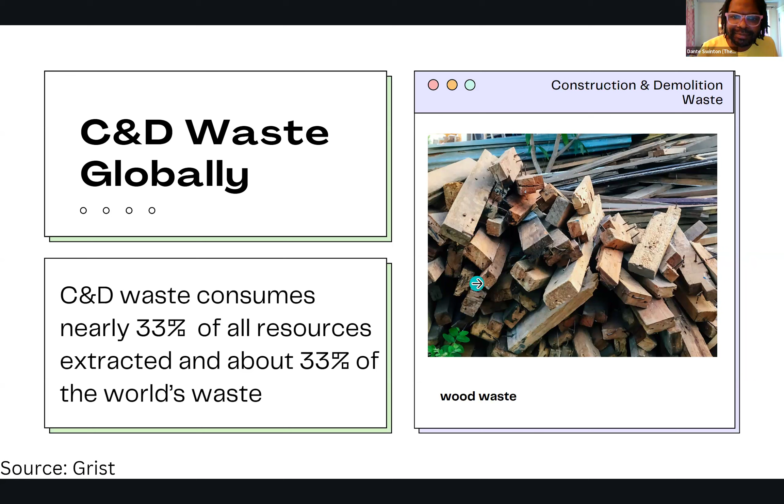Building materials alone are a massive part of the world's extracted materials, guaranteeing to be a major contributor to climate change. Manufacturing the materials that make up our buildings produces over 10% of the world's carbon emissions. To give some greater context, the aviation industry contributes about 3% of global carbon emissions. So building materials account for 4 times as much of that embodied carbon.

Closer to home, some 150 million tons of C&D waste find its way to landfill every year, even though much of those materials could be recovered.

The demolition materials are commingled, like this picture shows, and like household waste, that reduces the potential value that exists in recovery. And so we have to ask ourselves, what exactly are we doing as a society right now?

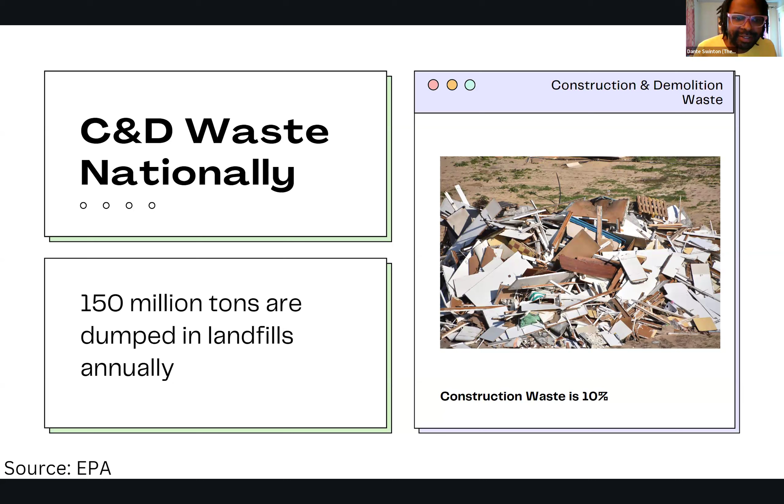Leigh and Patterson, back in 2006, probably said it best: demolition turns assets into liabilities. Instead of utilizing that building again, or maximizing the value of the individual components, jurisdictions are often responsible for the long-term management of these materials. We need to develop a system that meets the mandate of a sustainable future, and that's why we are here today.

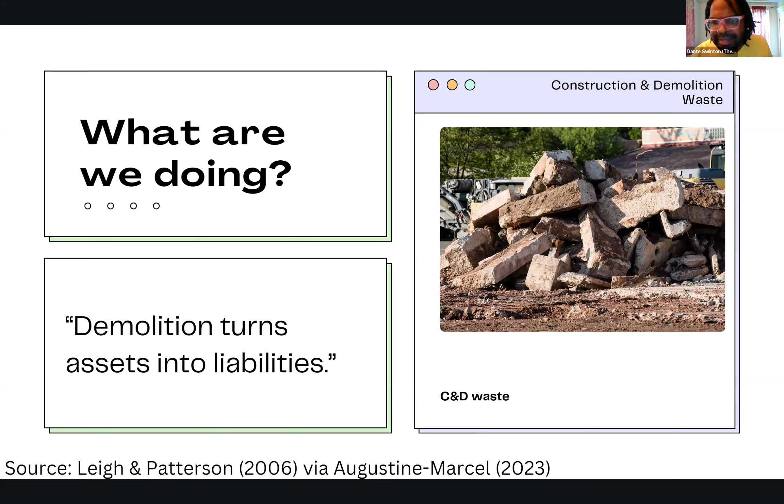So what is deconstruction? The careful dismantling of structures piece by piece in order to harvest the materials to be salvaged for reuse.

Deconstruction is a money maker. It's worth $1.4 billion in revenue just in the year of 2022. In fact, when compared to the US economy as a whole, material reuse industries are expected to grow at a faster pace. In the next 10 years, growth in reclaimed lumber, aggregate, and plastics are projected to outpace the US economy overall.

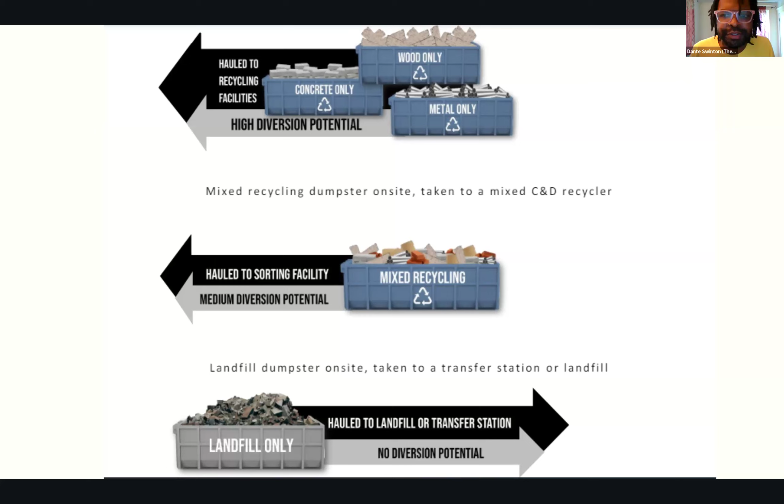Here is a great infographic from the City of Nashville's Construction and Demolition Guide for commercial projects. If we start from the bottom, we have the usual commingled materials with little to no value. There is a middle ground where some of the recyclable materials are sent off-site, as you can see in the middle of the screen here. And while you get some diversion, you will not get as much as the top image here, which shows source separation on-site prior to transport.

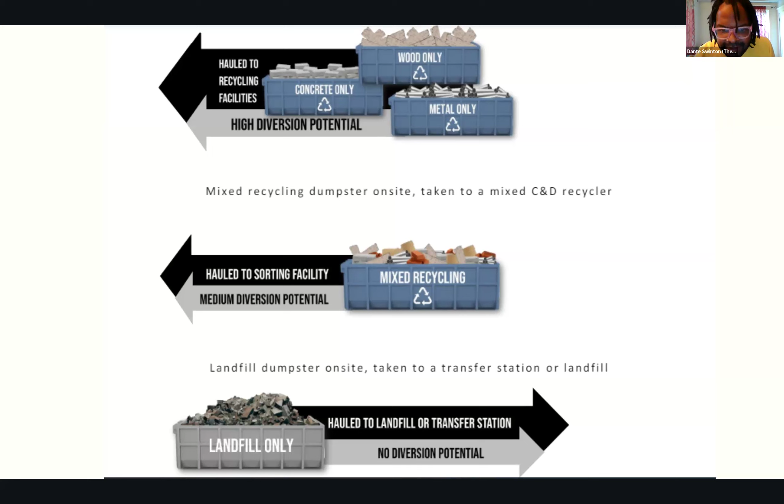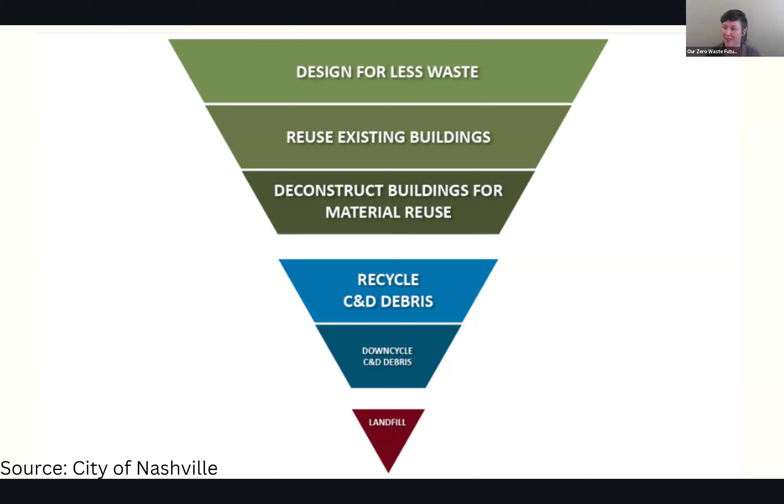And we'll see examples of where that has already taken place in our city. Blue highlights recycling, whereas the least desired outcome is highlighted in red at the landfill. The future is prioritizing reuse.

Here we see an example of a truly missed opportunity with the old Baltimore City Community College Bard building in the Inner Harbor. It was built in 1976. This building had been vacant since 2009, and proposals to repurpose the site were rejected by the college while it sat vacant for 15 years.

A quote taken from The Architect's Newspaper says: 'One of Baltimore's former housing commissioners was an architecture aficionado who kept a wish list of prominent architects he'd like to see design buildings for the city's skyline. And he landed many of them. Others enlisted to design buildings in downtown Baltimore included Henry Cobb for the World Trade Center Baltimore, Edward Durell Stone for the Maryland Science Center, and Benjamin Thompson and Associates for the Harborplace Pavilions. We need to prioritize architects that are designing their buildings with the future of sustainability in mind.'

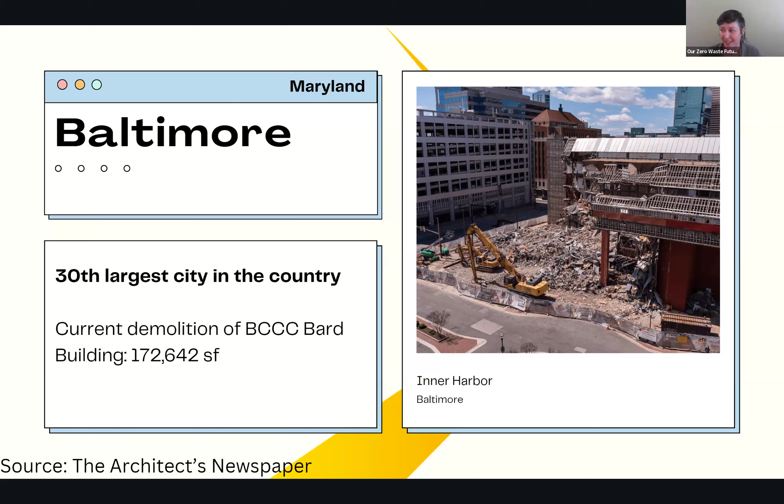I don't know how many of y'all drove past this demolition taking place. I think it's almost done. There's not that much left, but I can easily see materials that could have easily been salvaged for reuse in construction of a new building. But when you take a wrecking ball, nothing is safe for reuse.

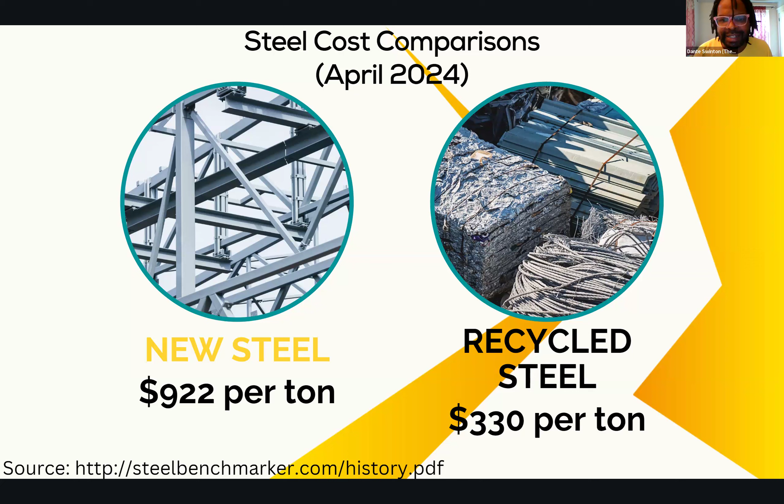So, using reclaimed materials can save developers money. Just one example is reused steel. As of April 2024, recycled steel costs about one-third the price of new steel in the US. Obviously, there's a lot of savings there.

Of course, not every reclaimed material will save you money. New wood is far more plentiful and therefore cheaper to acquire for new projects. However, it does not have the strength nor character of reclaimed wood, and the aesthetic is very different and less desirable.

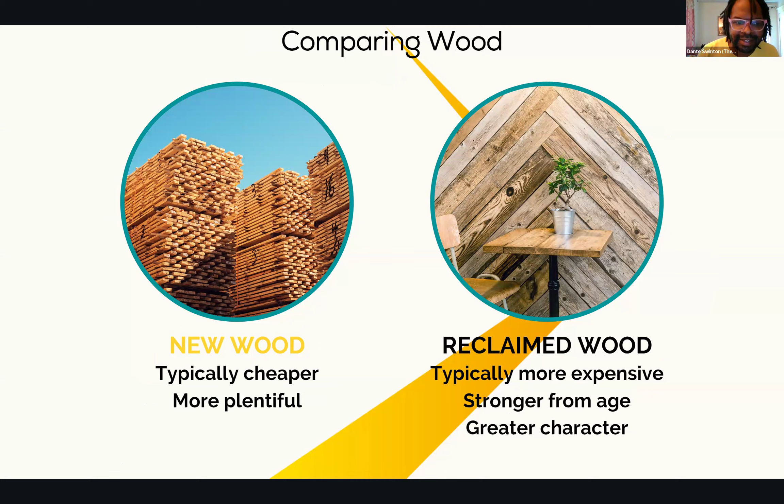Next slide. So here we'll take a couple of snapshots of cities with examples of deconstruction. In Pittsburgh, the current process of demolishing buildings mechanically is both expensive and environmentally harmful. Since 2015, the city of Pittsburgh has spent over $12 million demolishing structures and issued private demolition permits valued at over $24 million. The mayor at the time in 2021 realized that there needed to be a change.

Indeed. And so if we move over to San Antonio, a city much larger than Baltimore has implemented deconstruction policy. The city's deconstruction ordinance began in phases, starting in 2022 with all city-executed removals of residences built in 1920 and historical buildings built in 1945, and Phillips will expound on this later. It is important to share that San Antonio's commitment to waste diversion, as the nation's 7th largest city, is something we should look to consider for Baltimore.

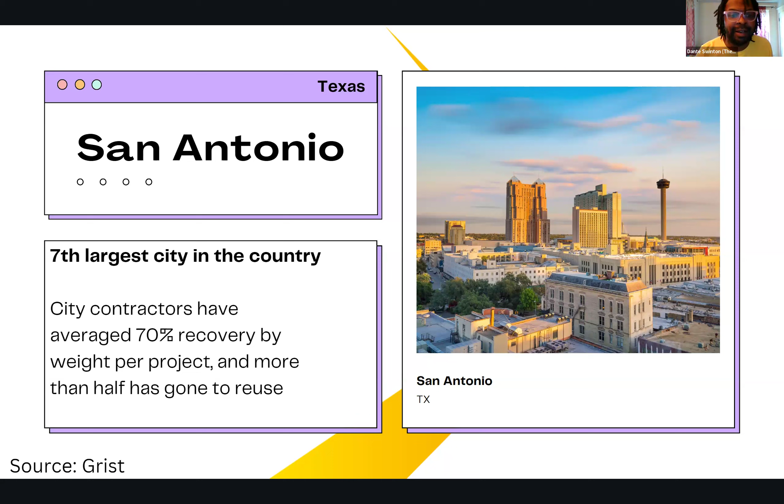Next slide. So here in Milwaukee, it's a similar size as Baltimore, being the 31st largest city in the country. In Milwaukee, we glean lessons learned from false starts and suspensions and issues with hiring contractors due to not meeting the local hiring aspect in their contracts. In Baltimore, we're working on the most forward-thinking policy, so understanding these pitfalls is crucial.

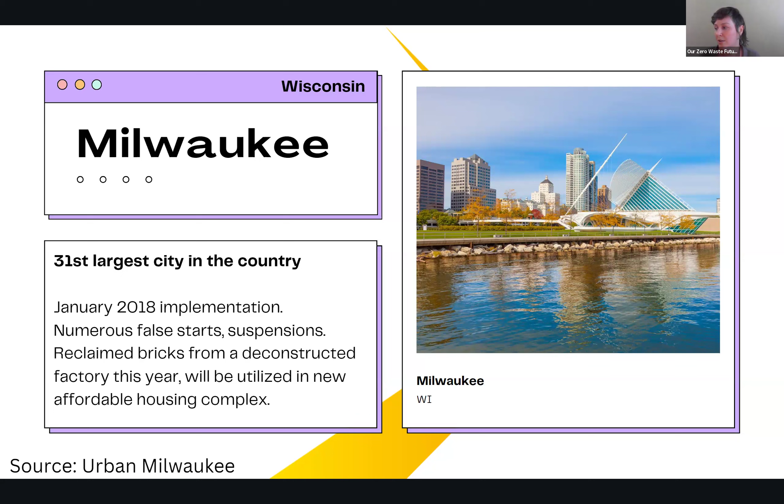So Portland was the guinea pig in the US, passing the first deconstruction ordinance back in 2016. Like San Antonio, it had a phased approach, first requiring all single-dwelling and historic structures from 1916 and earlier to be deconstructed. This was followed by an expansion to all pre-1940 single-family homes and designated historic structures.

Next slide. So in Detroit, we highlight more lessons learned from a city similar in size to Baltimore, also with a trash incinerator that has since been closed and was demolished last year. They also have similar issues of a large vacant housing stock and the need to remove blight. So despite there not being a policy, the Architectural Salvage Warehouse of Detroit is a nonprofit doing deconstruction in the city, attempting to reclaim the valuable old growth wood used in their older housing stock.

Executive Director Chris Rutherford states that out of the 2,500 projects slated for demolition in 2023, they're hoping to win demolition contracts so they can partially deconstruct 50 projects this year, 2024, and over the coming years, 50 each year, which would be a first for a deconstruction-focused company in Detroit.

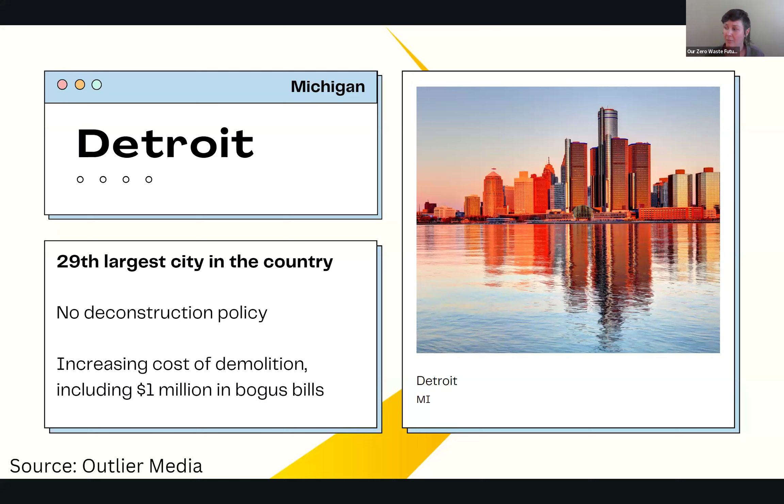He goes on to say that the climate for it is changing in our favor, he said of deconstruction. People are starting to realize that construction and demolition waste is a huge component of what's going into the landfill, and of what's also producing carbon emissions. City leaders, he added, were doing the cheapest things they can, which externalizes the cost, of course, by filling up the landfills, but you can understand the motivation.

Absolutely. Thank you, Steph. All right, so we can even look to smaller communities for leadership on deconstruction. Boulder, Colorado, about a fifth the size of Baltimore, was home to one of the largest commercial building deconstructions in the country, with the breakdown of the old Boulder Community Health Building.

Some 60-plus million pounds of material from the site were salvaged and reused, including steel in a new fire station. Some of the materials wouldn't even leave the site at all, contributing instead to the foundation of a future affordable housing project.

Now, as Steph mentioned earlier, think again about the 173,000 square foot bar building downtown here in Baltimore that was demolished instead of deconstructed, and how many millions of pounds of materials could have been reused. Next slide. You got it.

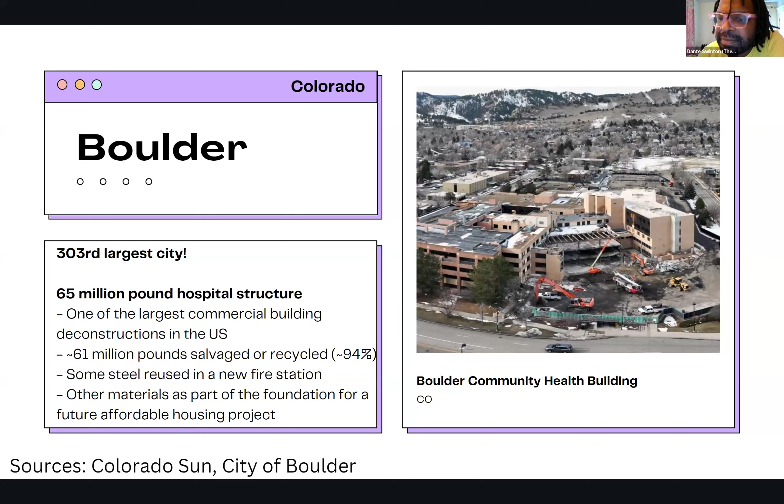All right, so after considering all of the lessons learned, it makes sense to do deconstruction over demolition to reduce pollution and create jobs. So Baltimore has the opportunity to be a leader in the country by passing the ReBUILD Act.

So let's take a look at the tenets of the bill next. Thank you, Steph. Here are some of the main tenets of what we envision in the ReBUILD Act.

Any building, commercial or residential, that would be safe to enter or able to be stabilized would require deconstruction. If hazardous materials are identified, abatement would also take place, like lead and asbestos.

The city would increase demolition permits and establish deconstruction permits, which would be cheaper to make the approach more attractive. The revenue from these permits would support the administration of the program and provide grants for new or existing businesses in the field.

The piece that would make Baltimore a landmark policy, however, is the requirement of new developments to use an increasing minimum percentage of reclaimed materials to spur demand. Credits would be available for a developer surpassing the minimum by 4 points via weight or cost of the project. Homeowners would also have access to a tax credit using reclaimed materials.

Next slide. In this Fast Company article titled, 'Buildings are terrible for the environment and this arena is proof,' according to the analysis, the former Royal Farms Arena was renovated for the CFG Bank Arena, eliminating the need for an estimated 3,500 tons of steel, 25,000 cubic yards of concrete, and 1.45 million gallons of water.

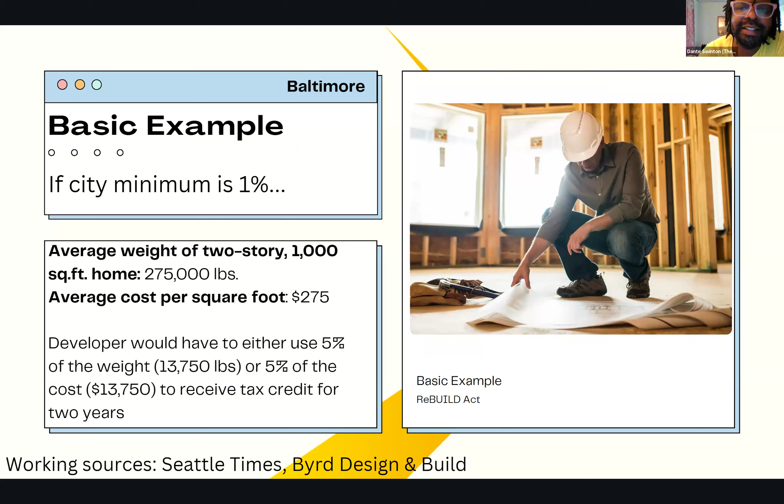Here's what a 4-year rollout of the policy could look like, which includes a 2-year period from passage to the deconstruction requirement. So for example, if the bill passed today, the deconstruction requirement would go into effect in 2026.

This would pair well with the recent building code update that requires 70% reuse or recycling of construction materials. Obviously, our preference is for reuse over recycling.

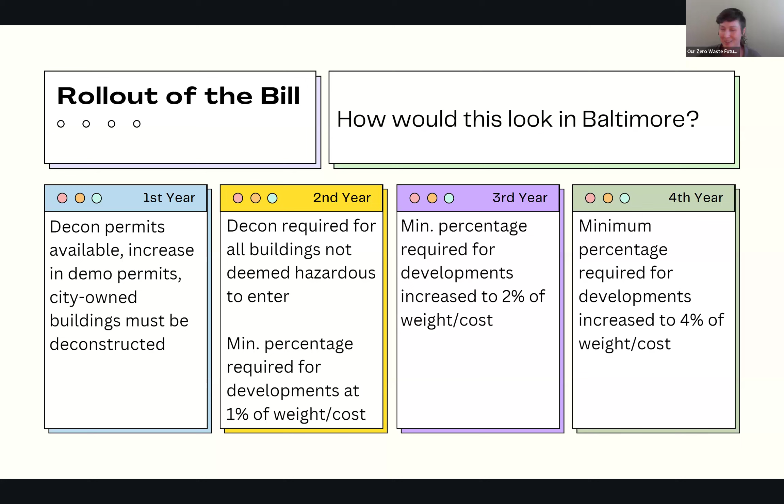All right, so next, excellent. We're going to transition to next steps and what the bill would look like. We have 4 actions outlined for this building reuse ecosystem that requires collaboration with all of its stakeholders.

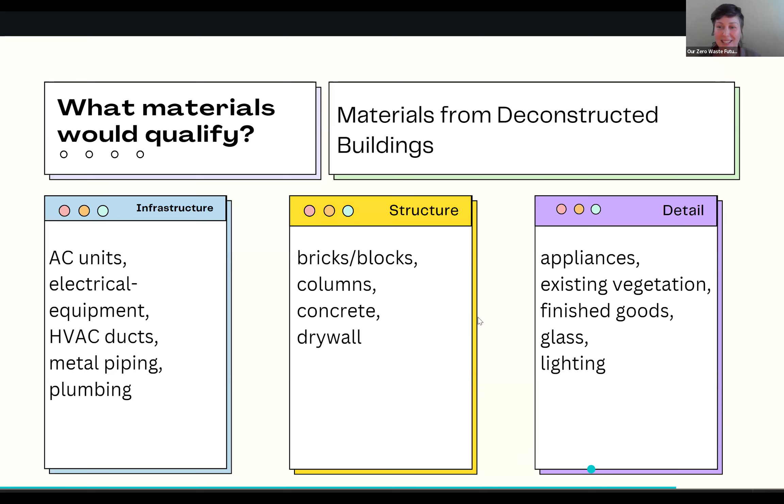So what we're advocating for is that we have to build up this local economy and get all these moving pieces moving at the same time, so we can accept those materials once they come. And we're going to keep this Q&A real short because we do have a jam-packed session.

Is there anything else you wanted to add to that, Dante, before I put the accepted materials up because of the councilwoman? Thank you for putting that up. Yeah, go ahead, Odette, I'm really excited about this.

I have the same question, obviously trying to work through what Larry was talking about. Getting it to Second Chance is one thing, but then somebody's got to get it, somebody's going to buy it. So we either have to incent it or we have to mandate it, and we have right now kind of a combination of the two. But I'd be curious to hear from folks on the call what they think about that, because that is, I think, the last missing piece relative to this bill. I think we can get the rest moving, it's just that we need to make sure this stuff is going to get used.

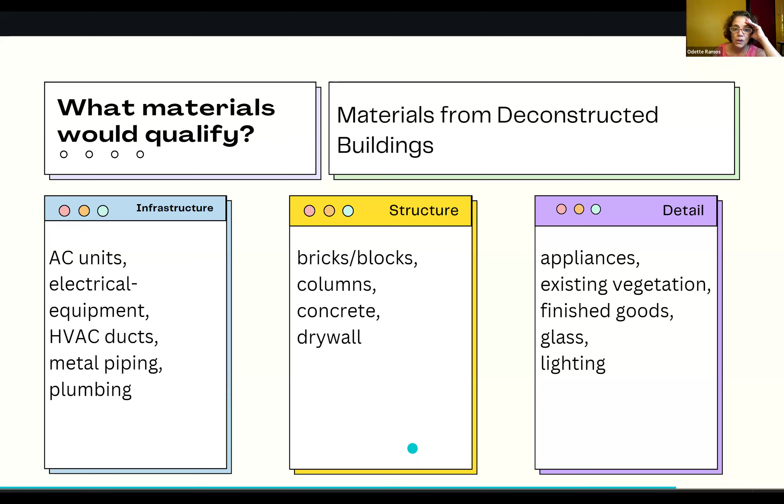And I think it will, like was said earlier, it will save people money because it's not something you have to wait on supply chain for. So anyway, that's kind of what I'm interested in hearing. And ideally, we want a direct sale.

We want to sell it from the site that it's happening at, so it doesn't have to go elsewhere.

I'm going to touch base on a couple things that have been brought up. When it comes to distribution, as Steph mentioned in the bill, we list that we want sort separation at site, sell at site, delivery to a location like a second chance or loading dock, and then reuse through institutions like Hopkins, Morgan State, park foundations, and so on. So there's a hierarchy of exactly where those materials would go, and you'd figure out which hauler takes materials to which location, or whether you can offload on site.

In terms of materials, as we continue to increase the number of buildings deconstructed over demolished, more reclaimed materials will be available. I know people are big fans of Baltimore's brick, our clay composition here—there's a lot of buildings with that valuable brick. As the years move forward and the minimum increases from 1% up to 2%, up to 4%, there will be more material available to meet that demand.

Last but not least, on job creation: right now the city sends about 300,000 tons of C&D waste to Quarantine Road landfill every year. Think of the jobs that would be created maximizing that material rather than burying it in Curtis Bay. And there was a question about incinerators—our incinerator burns up to 2,250 tons of material every day.

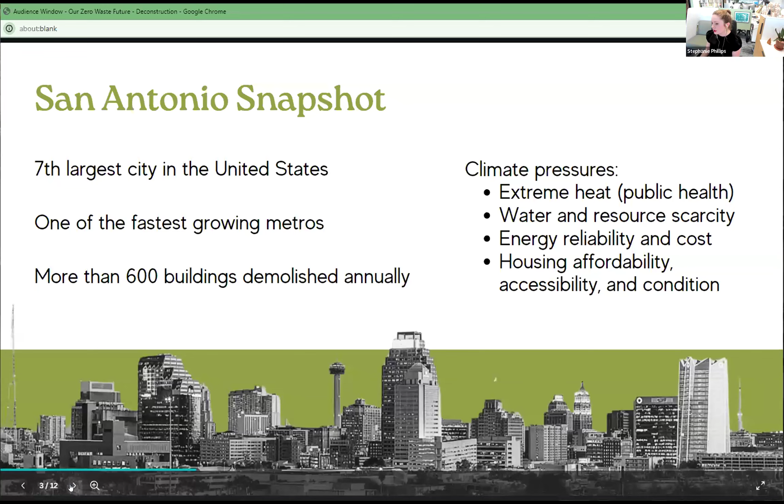We also see a lot of pressure on our water and resource scarcity, and then energy reliability and the cost of energy. And then another climate dimension is just housing affordability, accessibility, and condition. This is probably the most relevant when we're talking directly about our built environment. But our ordinance is not just about waste diversion and mitigating the environmental disparities created by demolition itself, but also how we can support our existing affordable housing units and repair what's already there instead of letting buildings fall into disrepair, which is the primary reason why they're demolished in San Antonio.

So our deconstruction ordinance, we adopted it in September of 2022. Something that you don't see represented on this slide is how long it took us to get there. We started talking about a deconstruction policy way back in 2017, so it took us over 4.5 years to get that ordinance adopted. Depending on where you are, that may seem very short or very long. But you'll hear in the next few slides that it was very intentional, and I admire Baltimore so much because that intentionality is in their bill as well.

So you heard that our ordinance was a phased approach. Our ordinance is residential structures only, and right now the current phase in effect covers any small scale structure defined as a fourplex or smaller—single family, duplex, triplex, fourplex—built in 1920 or earlier citywide. If it's located in a historic district or neighborhood conservation district, basically a protected area, that build date is 1945. Our ordinance is automatically expanding in about a half a year, so on January 1st of 2025, those build dates will increase to 1945 and earlier citywide and 1960 and earlier in those protected areas.

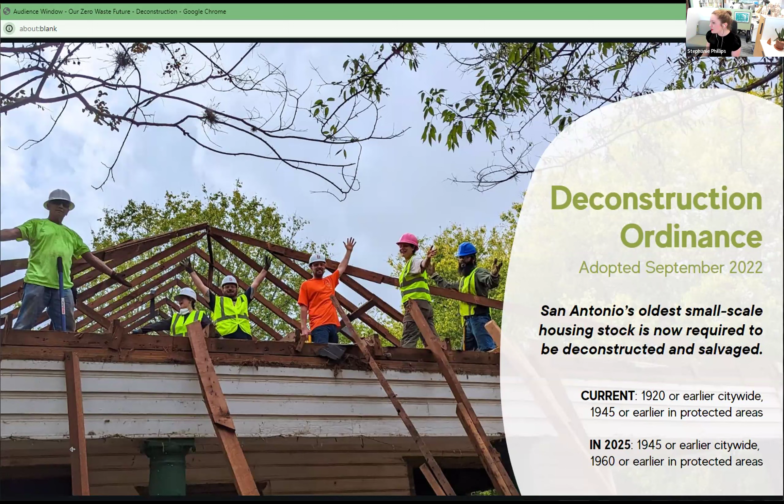And the size of housing stock will also increase. We're going to start capturing 8plex and smaller, so kind of smaller apartment complexes. And I'll show you some data on the impact of numbers in a bit.

So I love this slide because everyone says, okay, you have a deconstruction ordinance, that's great. But the deconstruction ordinance is very much sitting on this building block of efforts that we've worked on over those years and continue to work on. Some of these are the questions you're hearing today. One of the first things we did back in 2018 was form a deconstruction advisory committee through the city. Some of the questions we consistently got were: who is going to do all of the work, and where is all the material going to go? So deconstruction workforce and assessing and investing in our reuse infrastructure in San Antonio have been probably the key drivers of our program here.

But on top of that are things like community engagement, answering the question, why does this matter to me personally, as well as my community, my neighborhood? Developing partnerships, because I'm representing the city, and obviously the city can't do any quality policy by itself, especially one that's trying to advance this industry. So who should be involved, and how can they help ensure success, not only to develop the ordinance, but to make sure it's effective long-term? And then data—data is huge. Answering the question, how will this ordinance impact San Antonio specifically? Not just waste diversion, not just housing, but also things like workforce development, cultural heritage, environmental indicators, things like that.

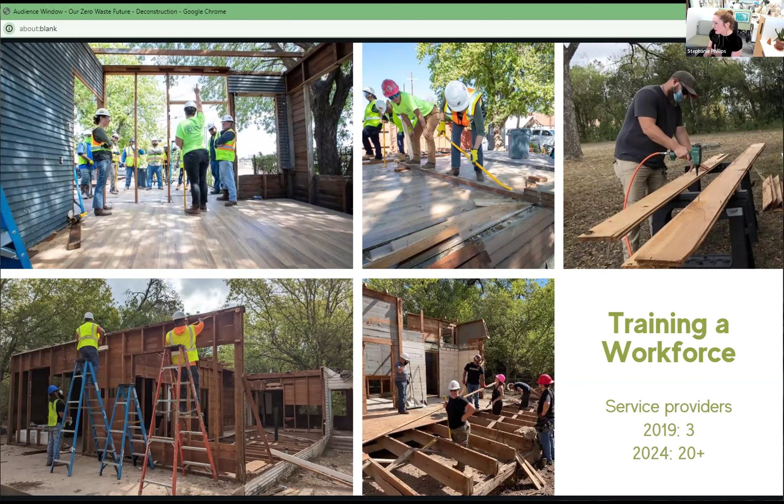So we consistently as a city try to partner with people like the Alamo, like the National Park Service, to host these trainings.

Another dimension was reuse infrastructure. Where is all the material going to go? And that also ties into some of the questions that y'all have been asking about who is going to receive these materials or buy them.

So San Antonio does have several reuse facilities, either nonprofit or private. But through our deconstruction advisory committee, we got consistent feedback from a lot of different people—builders, developers, even those reuse retail stores—that the city would need to play a role in, at minimum, providing laydown space for building materials. And that is what created what we call the Material Innovation Center.

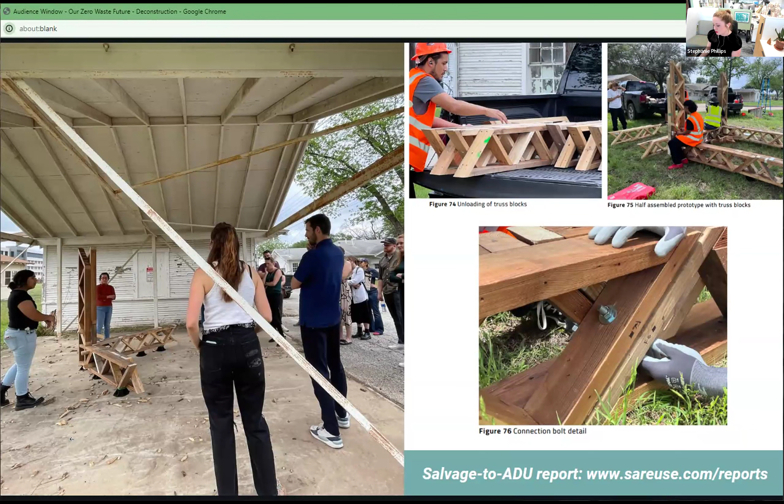So we're continually working with universities on those questions.

And then we love data. I don't know why it's not showing up.

Okay, so we have had 32 deconstruction projects in fiscal year 23, 43 in 24, and we're estimated to have 80 plus in 2025 because the ordinance is going to expand. So we are largely seeing consistent investment and growth in those projects.

But then in addition to that, we track data around affordable housing projects served, like I just mentioned. So I think what's really key is that, yes, we're talking about waste diversion, and there's more performance metrics that we're tracking right now.

We're in the middle of budget season, so this is top of mind in reporting to our finance department. But this is the world that can be expanded by adopting a deconstruction ordinance, especially when you have end uses in mind, partners developed, and a focus on large city goals like climate action, housing, workforce development, and cultural heritage, which we've nested ourselves into intentionally with our policy.

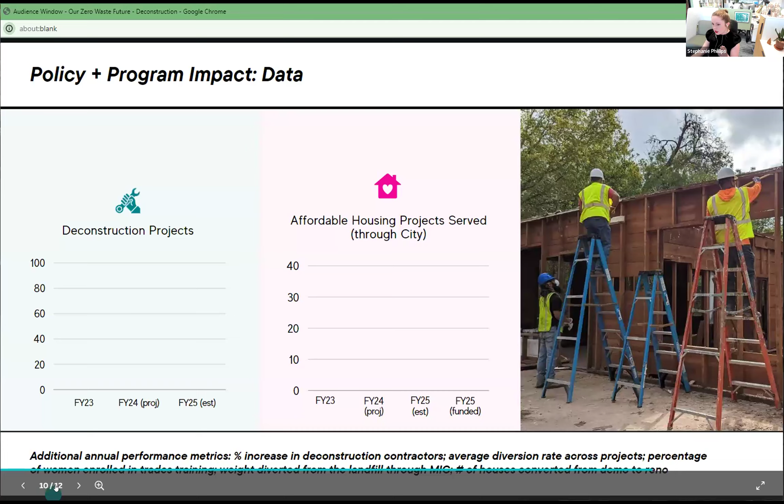Our tagline currently is: landfill doesn't deserve these materials, our communities do. So that's our framework and frame of reference, and happy to answer any questions while everyone is speaking in the chat. Thank you all very much.

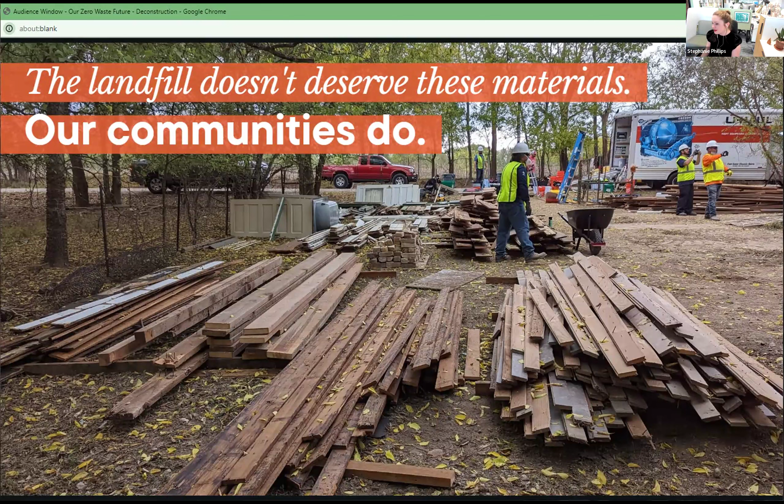Beautiful, well done, thank you Stephanie. Such good insights there. All right, we're going to keep the program rolling.

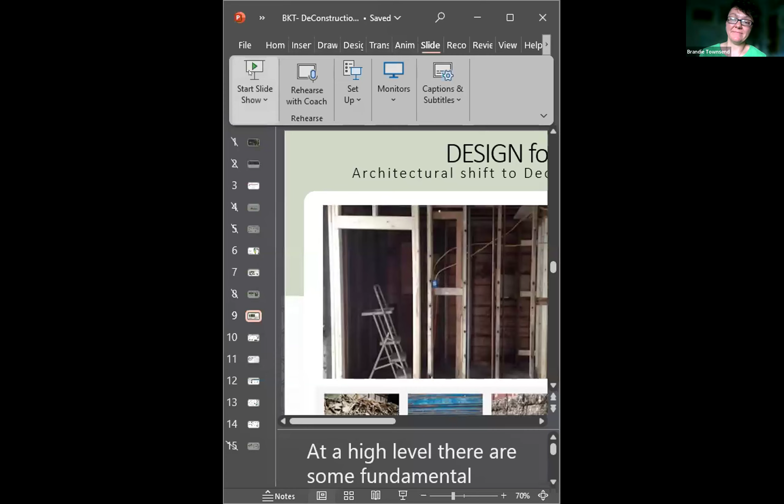Sorry, I was on mute. Hi, I'm Brandie, and I am from Rome, Georgia, right outside of North Atlanta. I've been doing deconstruction, landfilling, and waste consulting for several years now.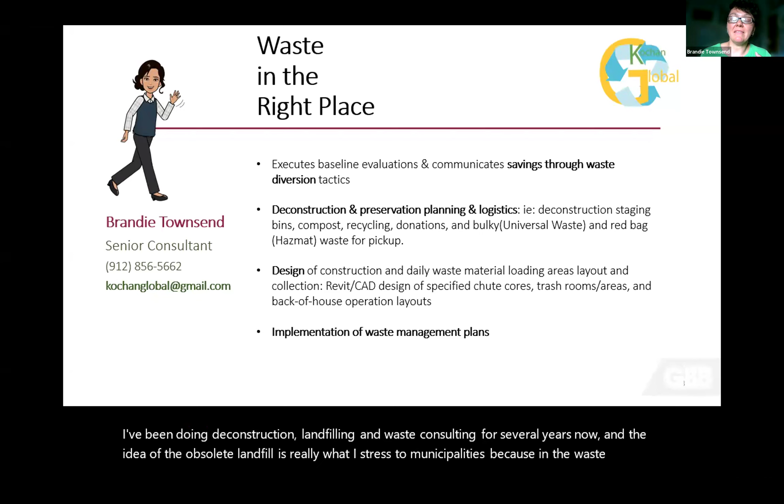The idea of the obsolete landfill is really what I stress to municipalities, because in the waste hierarchy there's really no place for a landfill anymore, since those materials have so much value if placed in the right place - where we see the recycling and reclaim industries and the commodity value chain is so much greater than putting materials in a hole that creates a liability. That's what I stress to communities and municipalities when they're at the end of their landfill life and want to open up a new landfill cell.

I say to them, why are you spending $11 million digging a hole when you can create a revenue stream out of all those commodities? Particularly if you have a C&D landfill already on your site, it's very easy to create the volume because it's already coming into the landfill - just put it in different piles, trommel it out, trommel your rock and sand and gravel out to resell it.

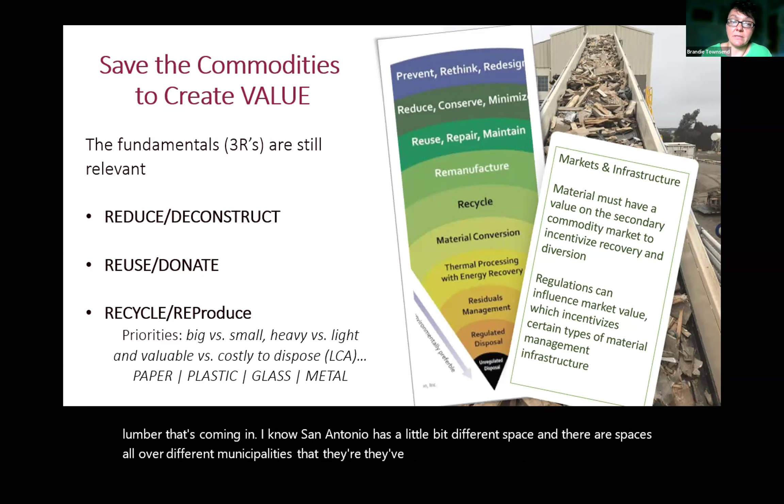Your MRF, your material recovery facility, your recycling center needs to be at the landfill so that recycling commodities - paper, plastic, glass, aluminum, metals - can all go through the landfill, creating a revenue stream. And then a warehouse next to your machine shop can house the reclaimed lumber coming in. I know San Antonio has a different space, and there are spaces all over different municipalities already on their books - unused land, unused warehouse space, old Kmarts, old Walmarts - perfect for warehousing the volume coming in over the scale.

There's also a workforce driver - here in Rome we use prison labor, and they are the perfect trainable workforce to build up and then send out into the community after they've served their time. They get certifications: forklift skills, denailing, inventory reclamation skills. That's really where you get the community play.

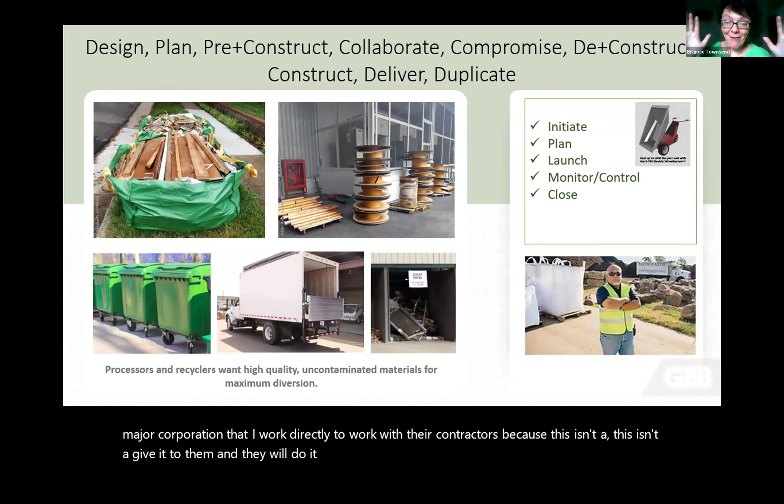The biggest stakeholder I've had the greatest opportunity to work with is your contractor. Over the last couple of years, there was a major corporation I worked directly with to work with their contractors, because this isn't a 'give it to them and they will do it' situation - change is hard for everyone. I was tasked with hand-holding all contractors for the retail renovations of a major cell phone company.

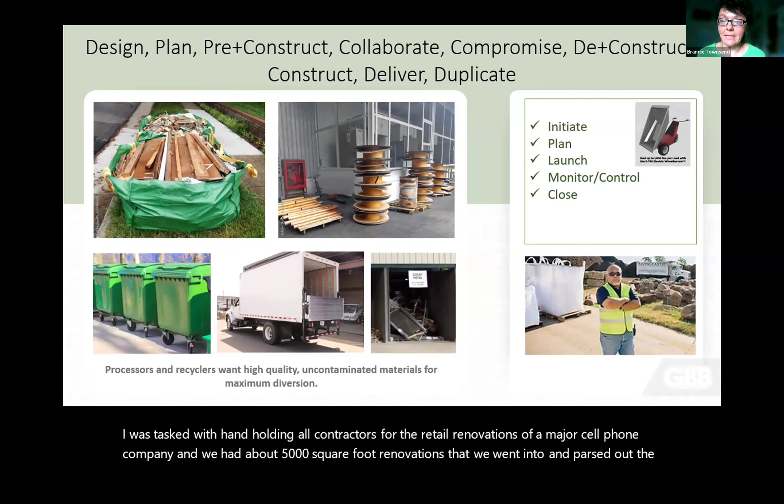We had about 5,000 square foot renovations that we went into and parsed out the material beforehand. We understood what was in the space through Matterport and LiDAR, took an inventory of it, and had a Revit model so that spec could come out and be calculated by weight, volume, and inventory, and then recorded.

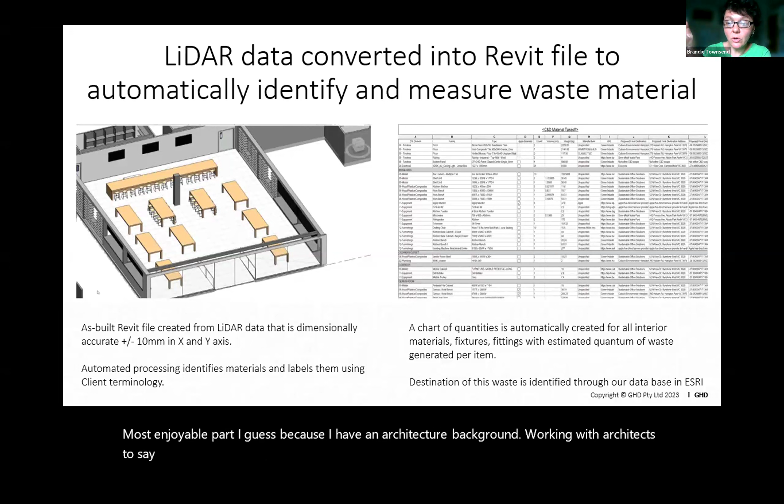You don't know how much waste you have unless you're recording it. And I think that's probably the most enjoyable part, because I have an architecture background, working with architects to say, when you do your Matterport for your as-built drawings, I want that as-built drawing and Revit file so I can create my inventory on all of those materials.

So when I have 10, 15, 25 task chairs, 30 stools, and 25 tables, I know who I need to target in that community who will take them—whether it's the library, the restore, the community school down the road, or the charter school. FF&E fit outs for commercial spaces are really good quality reusable material. Those task chairs were $200 each or more, and they have definitely a lot of life left. So we were able to really divert to the right people.

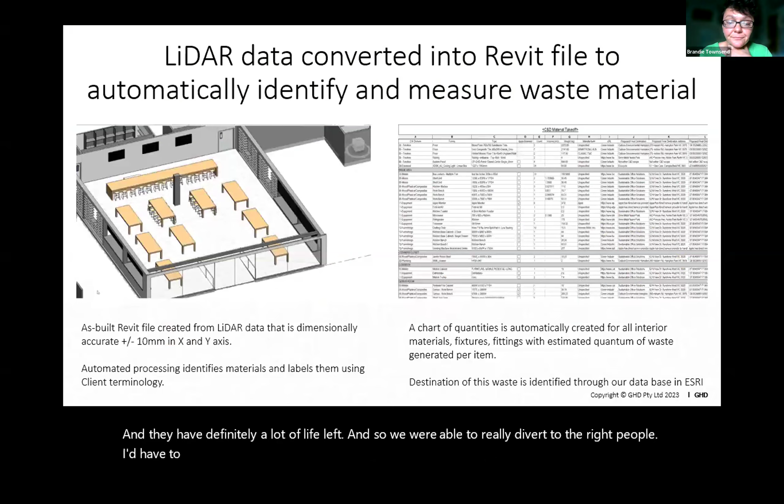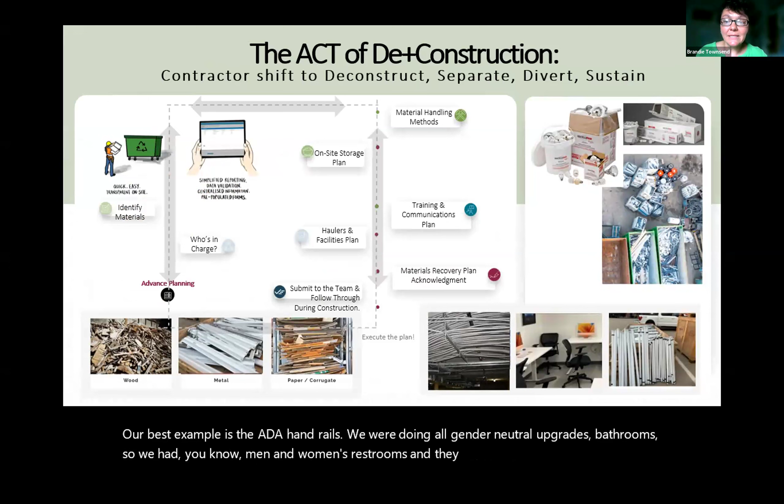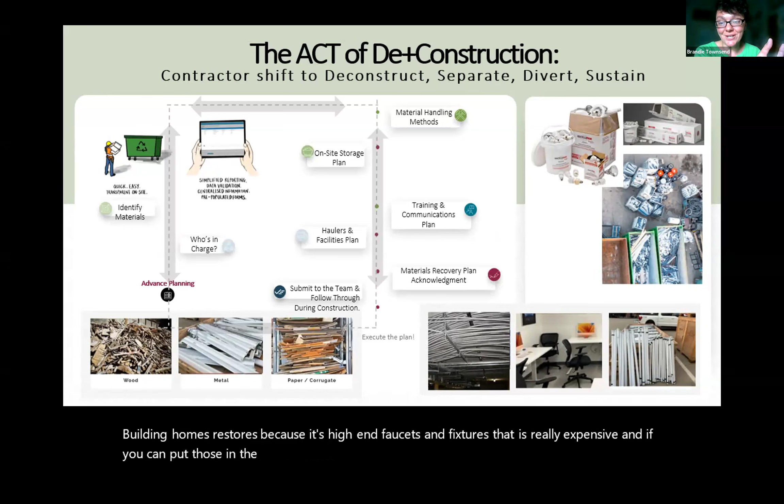I'd have to say our best example is the ADA handrails. We were doing all gender neutral upgrade bathrooms, so we had men's and women's restrooms with beautiful stainless steel ADA handrails, and they all went to Habitat building homes and restores, because those high-end faucets and fixtures are really expensive. If you can put those in the right direction, they are priceless, because handrails don't come cheap.

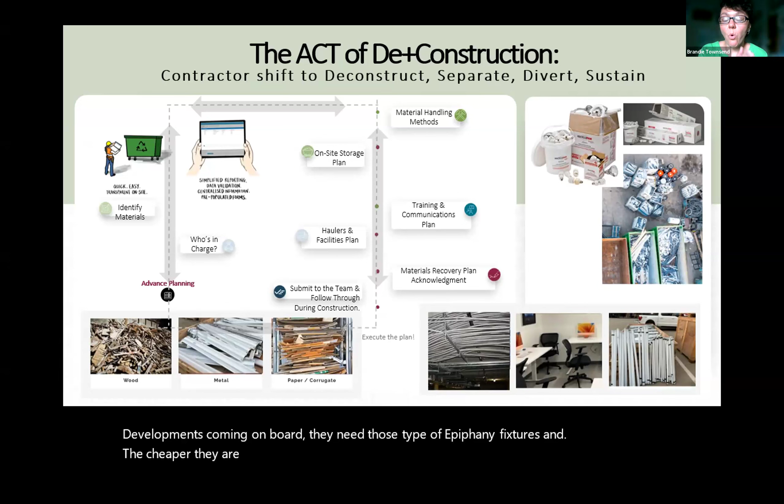Especially with senior living housing developments coming on board, they need those types of FF&E fixtures, and the cheaper they are, the better quality, and they hit their minimum building standards a lot quicker. The building inspector can come in a lot quicker if they've got all of their ADA facility FF&E fixtures at hand.

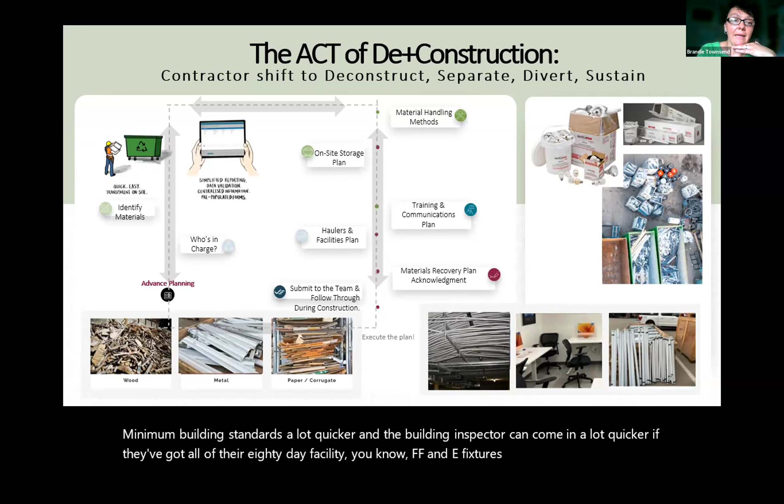Same goes for, ironically, toilets. Toilets in commercial spaces are still high end—Toto and Kohler don't come cheap. So the reuse of those is a great commodity. We had success, and that's where our bulky materials, FF&E items, and our concrete by weight got us the numbers we wanted to see, between 80 and 90% diversion. That was the goal of the corporation.

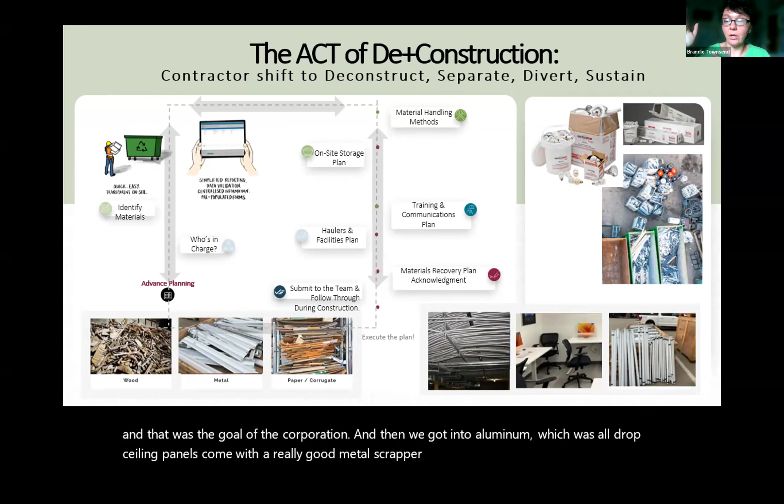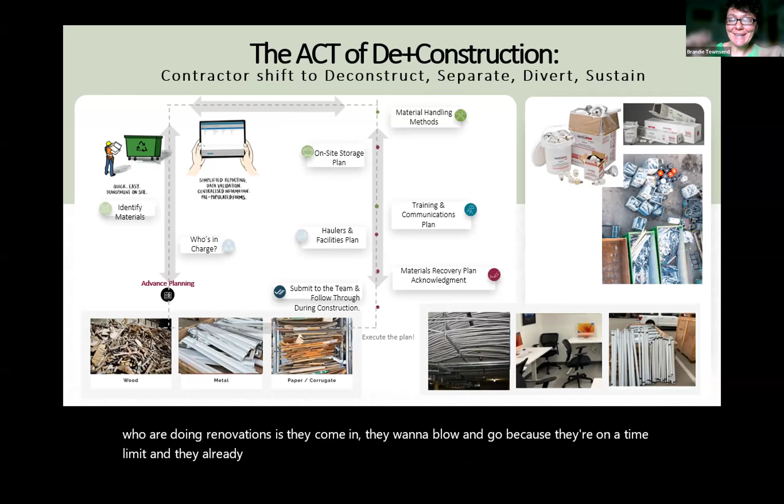Then we got into aluminum—all drop ceiling panels come with a really good metal scrapper market rebate. The biggest challenge I had working with contractors doing renovations is they come in wanting to blow and go because they're on a time limit, and they already have their dumpster picked out, so they just want to throw it all in one.

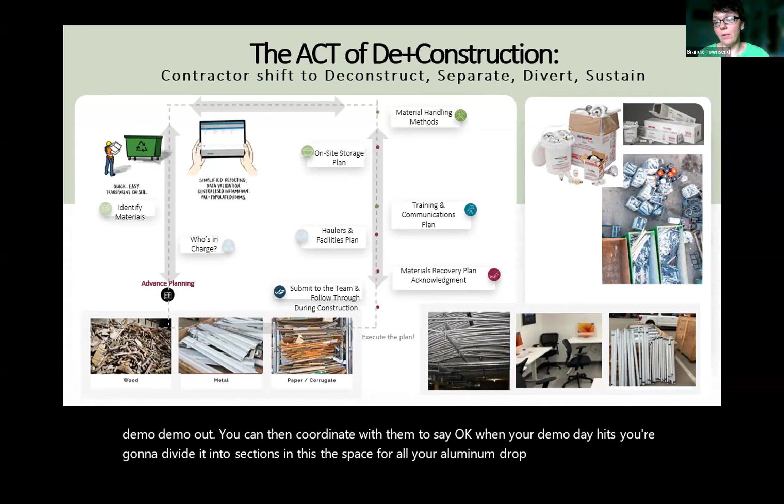But if I can get them into pre-construction planning phase, you take an inventory of what they're going to demo out. You can then coordinate with them so that on demo day, they divide it into sections in the space—all your aluminum, drop ceiling, lumber, in this case metal studs, all your concrete, gypsum board, and aggregate material going in the dumpster, because by volume and weight that's going to nicely go to the C&D landfill and be separated correctly.

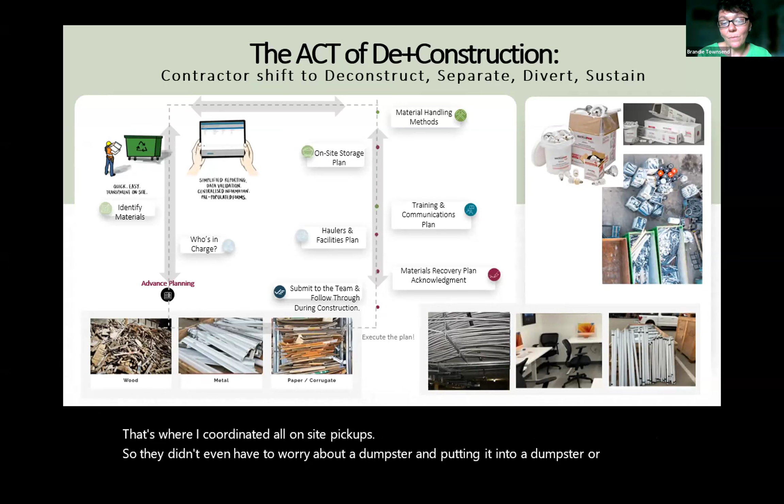Then with the bulky FF&E materials, that's where I coordinated all on-site pickups, so they didn't even have to worry about a dumpster or paying a dumpster pull, because it was already picked up by Habitat ReStore. That saved them $500 a pull. That's where the cost comparison comes in.

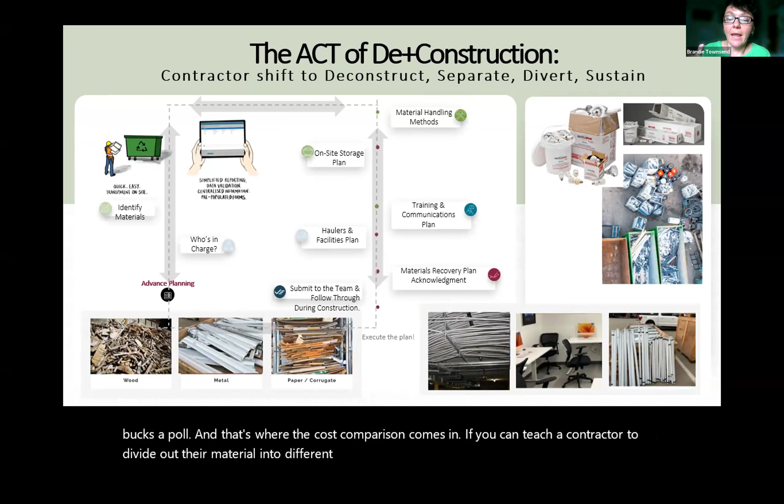If you can teach a contractor to divide out their material into different sections on site, and have a metal scrapper coordinated, he'll come pick up the metal material. Most electricians do their own scrapping, and most plumbers do their own scrapping.

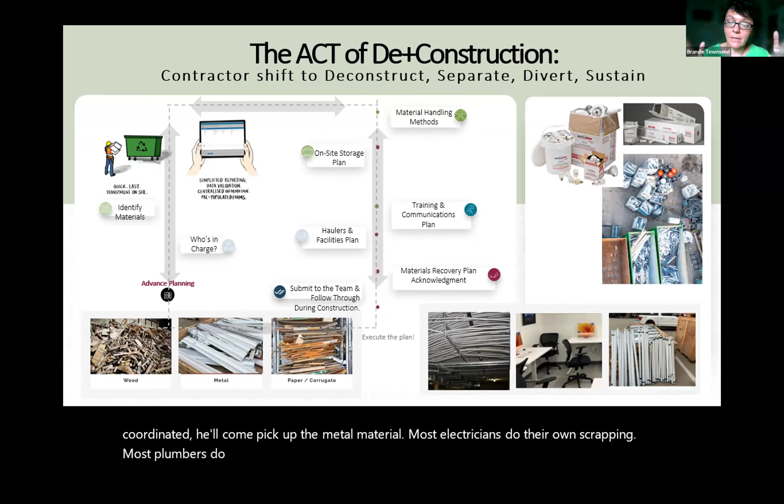Scrap in spaces that are commercial spaces. PVC isn't recyclable, and we're working on that, but with plumbers and trades.

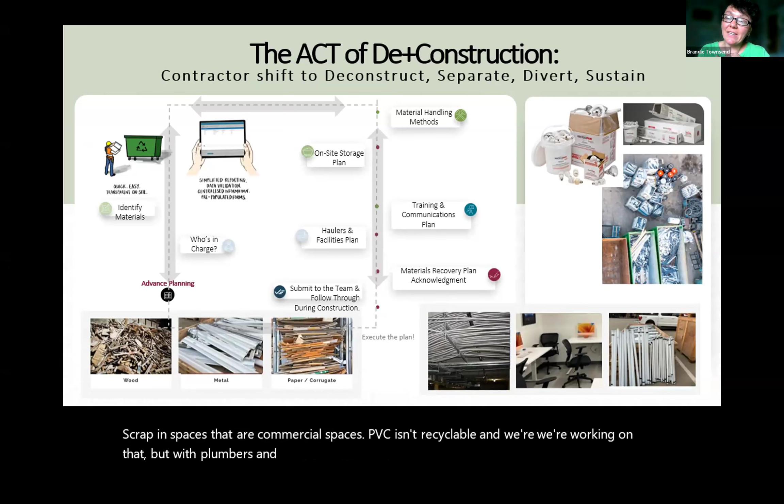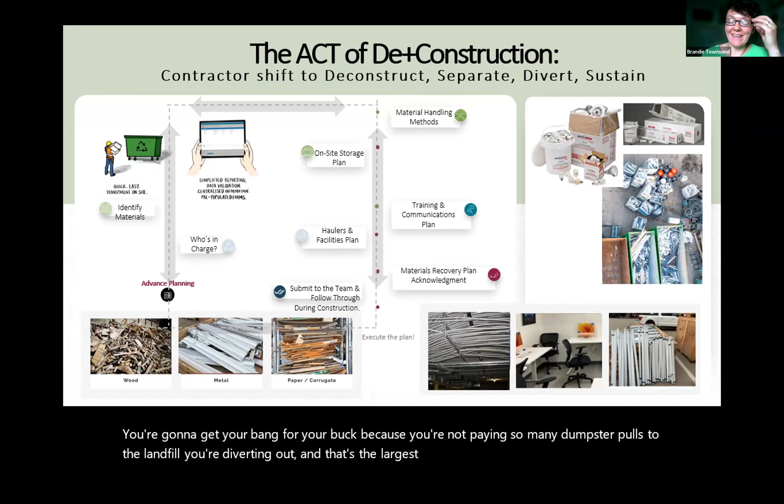And then you've got the rebate, and the commodity market is what creates the cost comparison and helps reduce the costs, and shows the contractor that if you separate on site, you're going to get your bang for your buck, because you're not paying for so many dumpster pulls to the landfill. You're diverting out, and that's the largest stakeholder. That's really where, if you can speak their language and hold their hand for a couple of projects, you'll have them on board for the next one.

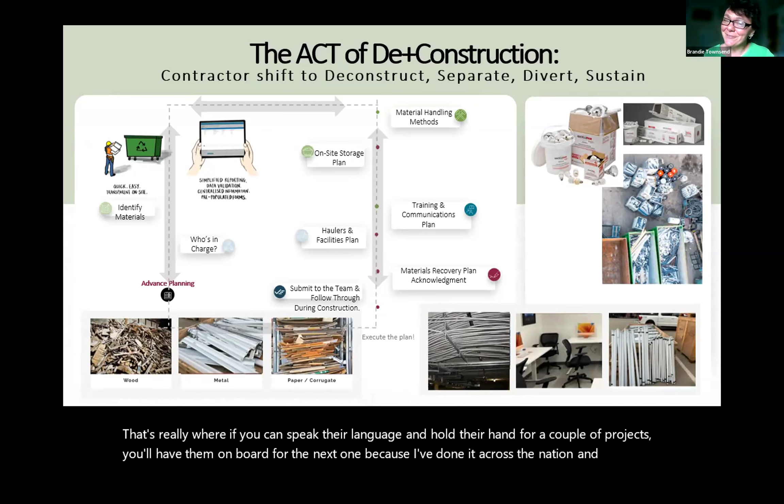Because I've done it across the nation, and here in Atlanta there's no ordinances, but Life Cycle Building Center, and there are some really good demo guys who are like, oh, I can make money on all my metal and scrap FF&E materials, let me do that. And they're willing to listen and willing to learn.

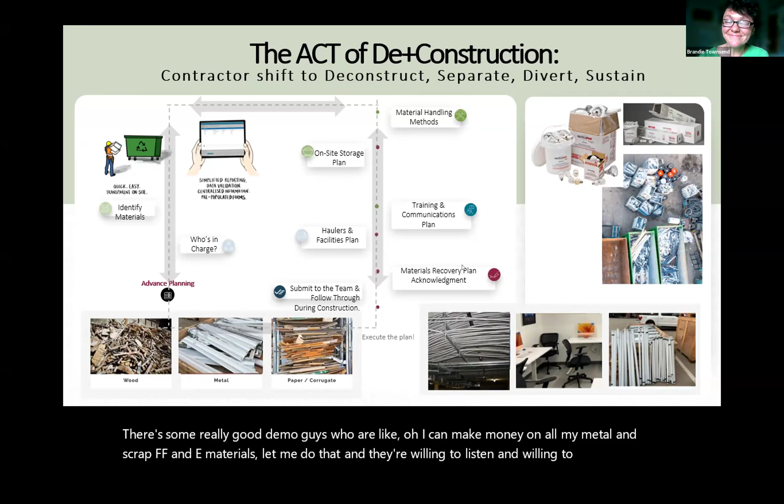Thank you, I'm finished. That was amazing. I love learning about the LiDAR and all the technology to scan and get access to what materials are coming, and I really liked what you used, the pre-construction phase. Yes, love that, that's where you got to get your contractor. Gotcha, cool, all right, we're gonna keep it rolling.

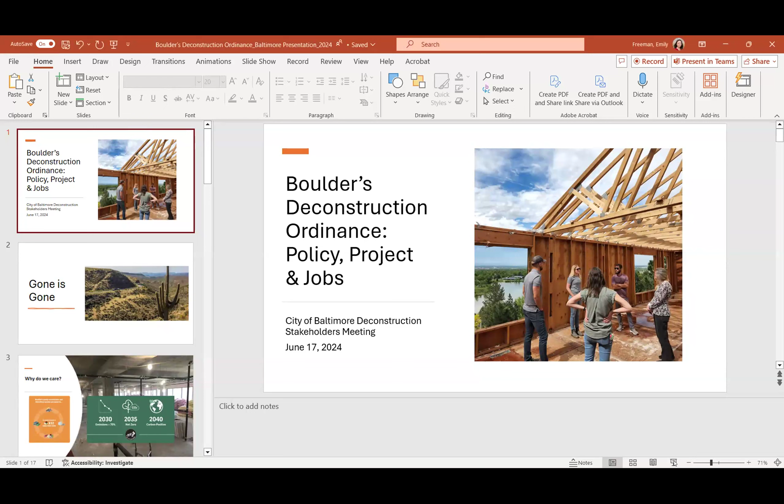All right, I am trying to do all the things. You're doing great, I know you're busy hopping from meeting to meeting, talking all things deconstruction. I'm glad, oh yeah, we all are. This is the stuff that we love.

Good evening everyone, thanks for having me. Today I'm going to present on Boulder's deconstruction ordinance, why we care about this, and what it means to Boulder. We're going to do a quick deep dive into a city-owned project, the Boulder Community Hospital deconstruction. It's not just city projects, but it's one that we owned, and so we like to present that as a case study so you can understand the process that we took, both as the property owner but also through managing the GC process. And then we'll be talking a little bit about green workforce development as well.

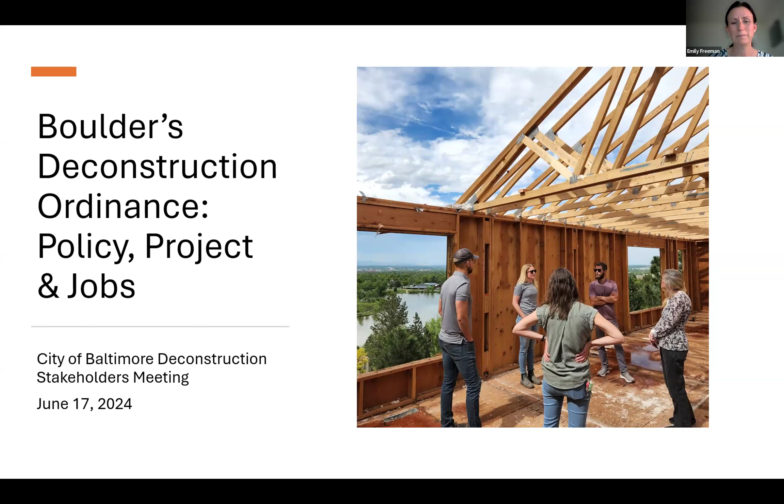So I kind of like to just start off. This is a picture from Arizona, the I-17 between Phoenix and Flagstaff. One of the first memories that I have, that I reflect back on for what I care about and what's influenced me in my career, is as I would drive this freeway back and forth with my family, there was a small hill, maybe small mountain, that was getting mined. Every time I noticed it would get smaller and smaller, but it was still there. And then one time we came past it, it was just this little tiny sliver of a mountain that was left.

All I took from that at that point was that gone is gone. Reflecting back, those materials were mined, we're never going to be seeing this again. And I think that really ties into demolition. So when you demolish a building, those non-renewable resources are lost forever, whether it's from a historic preservation standpoint, and these are valuable, high-quality building materials, or even if it's from newer construction, maybe you have materials you can soft strip and recover, or even still taking lumber out of those buildings. If we don't deconstruct and we demolish, gone really is gone.

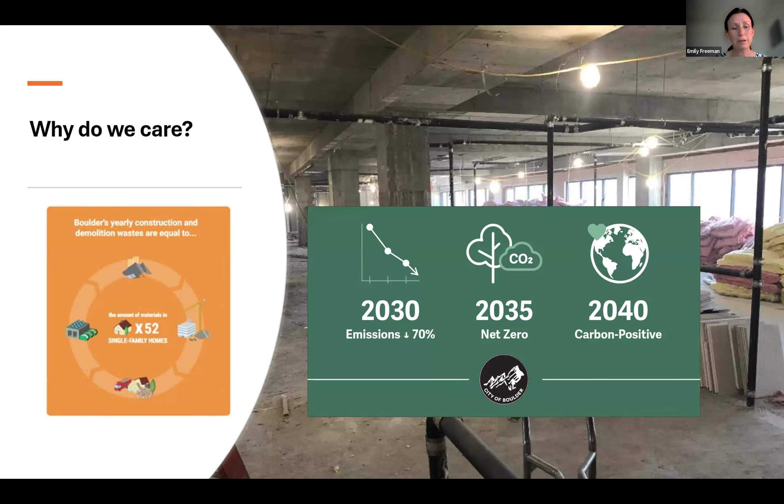So if we really want to start to move the needle, even those small changes, which really is a big programmatic change in moving towards deconstruction, making those changes are going to really create that exponential shift towards us being able to meet our emissions reductions targets.

So growing off of the report, we wanted to develop a deconstruction ordinance. The goals and intent at the outset have been around materials reuse and recycling, gaining compliance from our contractors, because we have had different iterations of materials management requirements in buildings for the last 15 years. But the degree that we got data was really minimal. So we really wanted to take a strong look at how we could ensure that contractors understood what the requirements are so that Boulder can meet its climate action goals.

And we wanted to make sure that we are able to be a lot more transparent in the data we are receiving, so it can help inform future decisions, but it can also allow us to have greater accuracy when we are reporting on our move towards meeting our materials reduction goals, our materials diversion goals, and all that wrapped up into our climate action and emissions reductions goals as well.

So here's what we're actually talking about. We passed the deconstruction ordinance, taking the effective date of July 1st, 2020. I always like to shout out to City of Palo Alto here as well, because Palo Alto has a very similar structure in terms of what types of buildings and scope of work that we are looking to do. And we have the same exact effective date. So we were the two leaders in terms of getting all residential and commercial buildings who are a full structure removal or a major alteration to be compliant with our deconstruction ordinance.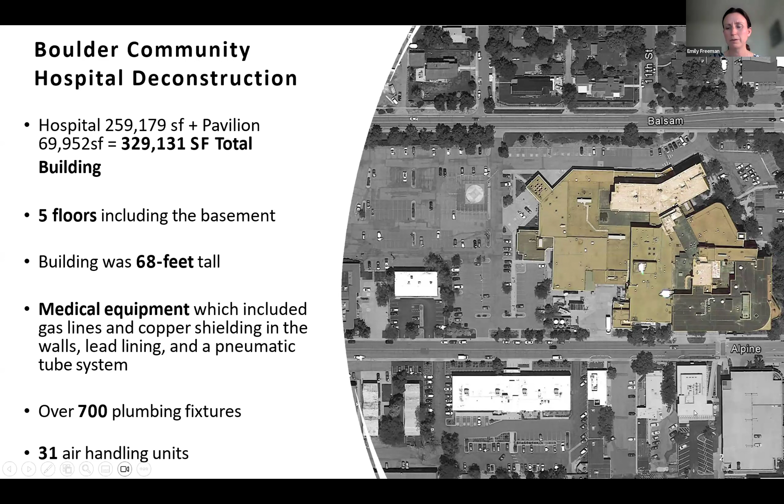But we are going to be utilizing the pavilion for adaptive reuse, and it's going to be the hub of the city's new Western campus. So my offices will eventually be in that building. And then we had a parking garage and the Brenton building next door that were also part of the initial purchase.

I have greatly reduced these slides. I just wanted to give you a quick overview. We went through each room and did a detailed inventory. We've heard other people talk about that pre-construction phase, and that's exactly what we're doing. We are inventorying all the available materials, whether it's fixtures, pumps, mechanical equipment, lighting, ceiling tiles, carpet tiles, doors, cabinetry. We inventoried all of that material, and these were just some highlights we wanted to bring forth.

We saved the grab bars, which I heard another presenter talk about. Those were all donated to different Boulder senior community organizations to help with ADA and safety in people's homes. The doors were not only donated, they were made into park benches and planter boxes, but other cities contacted us as well and were able to reuse those.

A unique aspect to this is that we did utilize an auction house to sell off a number of these different building materials, and that's not something we have taken the steps to do in the past. We would have maybe just sent this off to scrap metal for recycling, but as I said, this is a case study for the city to see how much was possible for us to reuse.

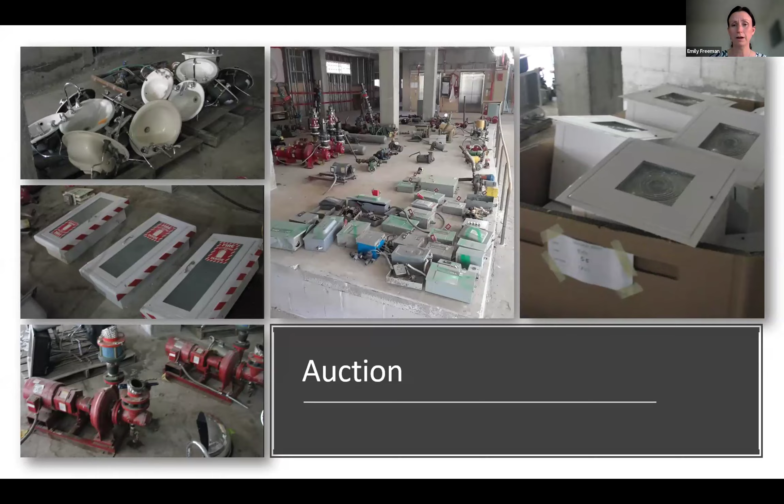So instead of steel being infinitely recycled, we said, you know what, there are still a lot of emissions, and if you really want to look at the embodied carbon of a building, maximizing the amount of material for reuse is the only way you're going to get the embodied carbon of that building down to zero, or as close to zero as possible.

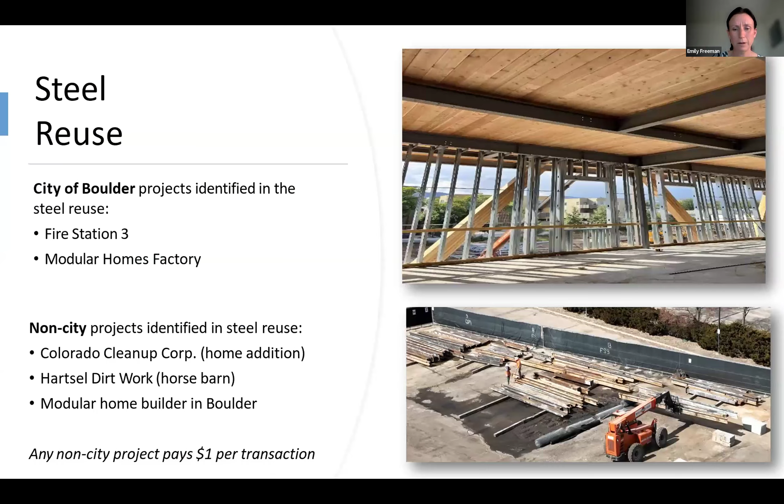Oh, I went the wrong direction. Another piece of that hospital deconstruction was the materials crushing. So we decided to crush the remaining concrete from building on site. We were able to use both that pavilion building, which is adaptive reuse, and the north wall of the hospital as a sound barrier, because literally if you look in this corner, that is a residential street, and there are $3 million homes on that street. We had no complaints related to dust or noise during the entire rock crushing operation.

What we wanted to highlight here is that the hospital is now filling in the hole. We calculated that we saved 2,820 dump truck hauls, whether we were to haul that material off to an aggregate recycler, and in addition, the return trips back to that site.

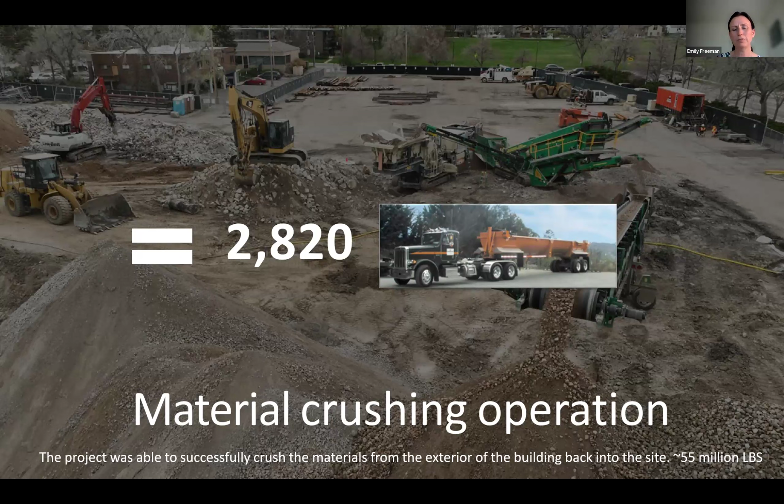Brandie, you were just talking in your presentation about how you calculate those costs. We want to highlight that we don't have the exact numbers, but I think it really highlights avoided emissions, avoided costs of hauling, and the avoided costs of having to purchase and pay for those truckloads as well.

Overall, we had a 94% diversion rate when combining both the interior and exterior deconstruction of the building. It really is an amazing win. We were at 98.5% if you just took the core and shell of the building. We're really proud of the project, but it really was this policy of having deconstruction prioritized and required that drove the city towards this innovation.

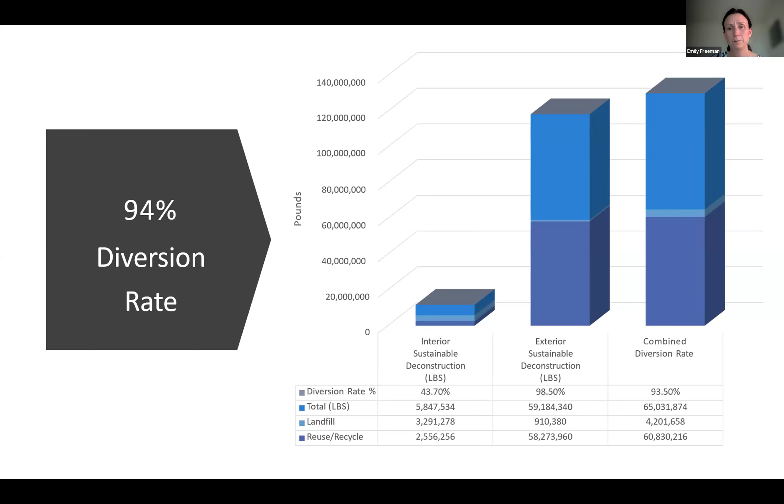We often get asked about the costs, so I just want to quickly dive into this. It did cost about 16% more to deconstruct the hospital versus traditional demolition, and really only about an additional 2.5 months longer. I think part of the way we could bring the cost down is looking at how to better calculate the cost of reuse of the materials.

In this, we're just talking strict deconstruction versus demolition. With the sale of those I-beams at only $1 per transaction, I think there's a lot more costs that could have been recovered had we sold those I-beams at a more market rate value as well.

We did not in this calculation account for the rock crushing that occurred on site, so there's different ways of looking at that. Yes, it was 16%, but if we look at avoided costs and potential revenue from the sale of valuable materials, there are different ways we could have brought down this amount. I can't tell you by how much, but that's something we'd want anyone to consider.

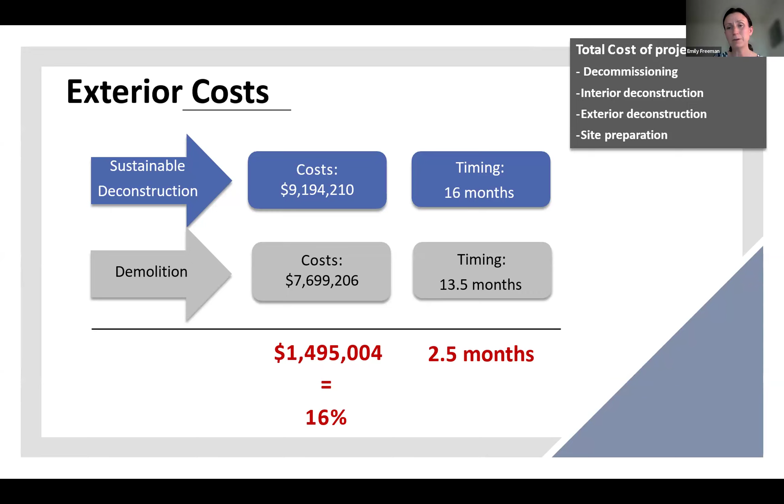So what are our lessons learned, especially as it relates to the Boulder Hospital deconstruction? Inventorying and knowing where those material markets are going to be is crucial for the success of the project. It takes significant time to plan, stage, and resource. We're very lucky that we own the property, so we're able to store those I-beams on site without having to worry about how quickly those materials are moving. That last point is having a single owner.

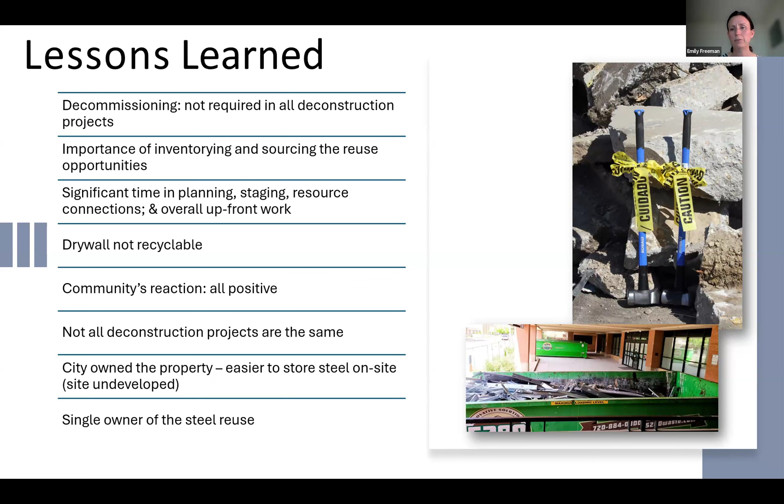We own the steel, so we were able to initially match it straight to a city project. Since then, we've worked with about 12 other projects, a mix of commercial and residential, and even farms that are going to be reusing this material. We're keeping it all local to Colorado because we're trying to keep the associated transportation emissions of that material down as well.

So when we're talking about workforce development, we've been doing a lot of outreach to our contractors through trainings and webinars back in COVID times. We have a deconstruction working group that meets, combining our haulers, our deconstruction contractors, our material and market processors, and of course the city as well.

Colorado has set up a job quality framework. If we want to create jobs that are relevant to us, we need to figure out how we can attract, create excitement, and create skills that are going to continue to elevate the green jobs and elevate the people who are seeking these jobs.

Deconstruction is difficult work. It takes a certain person who would like to be out there, but it's construction in reverse. It allows us to say that if you learn to deconstruct a building, you're going to better understand how it goes together in the first place. These are transferable skills that a worker can take throughout their career in the construction field.

I spoke with several of our leading deconstruction contractors, and the consensus is that between 2 to 3 people are needed to take down a residential building within 1 to 2 days. But with deconstruction, the crew sizes vary from 4 at the very lowest to about 8, and it's taking about 10 to 14 days to take down a similarly sized home.

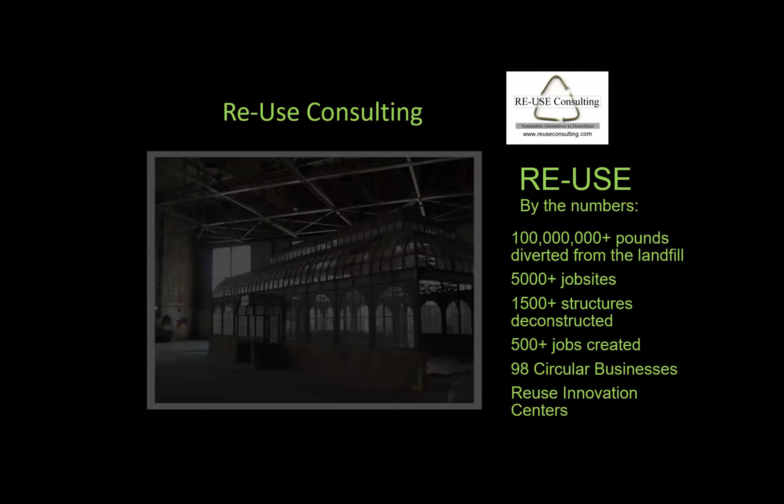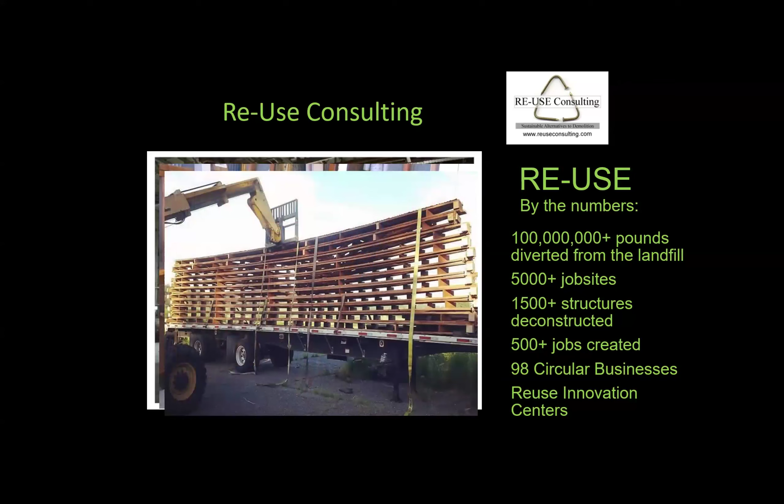Yeah, so we've diverted about 100 million pounds from landfill, not including concrete, of course, because that's kind of a prerequisite for us. Lots of job sites, lots of jobs created. Gosh, we're almost to 100. So we've almost helped start 100 circular businesses across North America. So we're getting really close on that number. That's exciting.

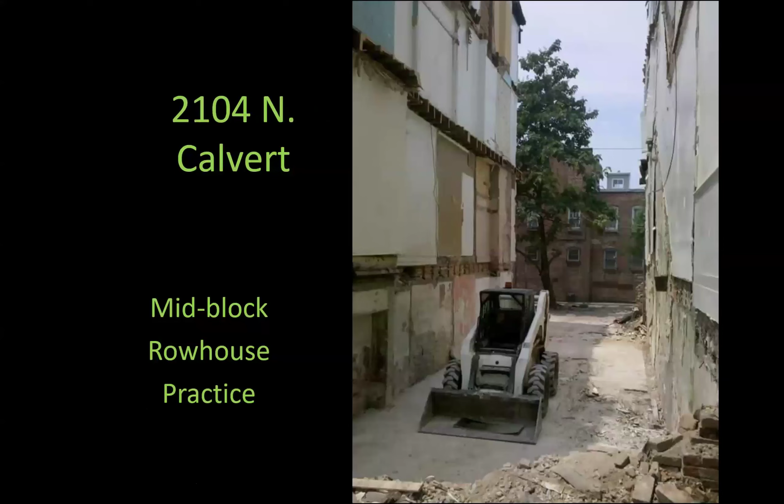You know, I work all over the place. Almost every city that you've mentioned in the entire presentation today, I've been or helped with. Portland, Detroit, everywhere, you know, Pittsburgh, you name it. So,

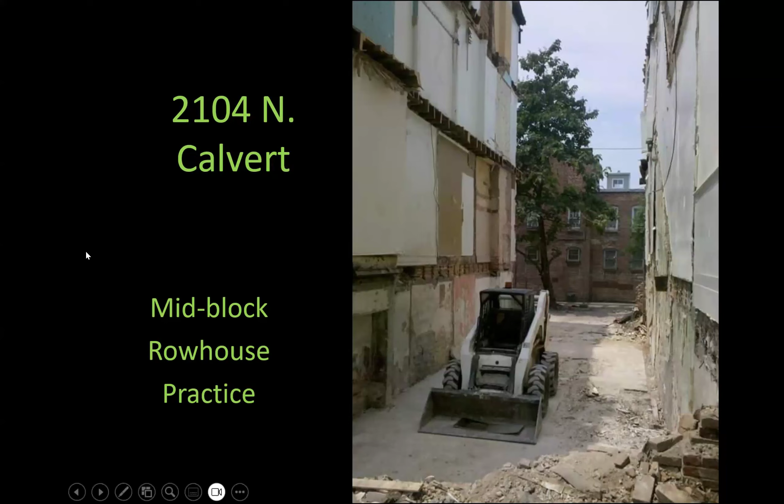And I love this project I did in Baltimore, where we got to practice on a mid-block row house. You see it's kind of rough what we left behind, but all of the row was being demolished, so we didn't have to do it. We didn't have to clean it up too much, you know, because it was just going to get demolished after we left, but good practice anyway.

And, you know, the project was something years ago that was there to help the mayor kick off yet another deconstruction kind of promotion. And so we had some local partners there that you see in Baltimore, and we had Mayor Rawlings Blake, right after that, I think, started the Vacants to Value project. But that's something where we look at our job site, and it was something to try and help promote deconstruction in the Baltimore area, which was already going on, but it was just another effort.

My talk today is mainly - you asked mainly to me to speak about workforce development. So I wanted to bring up this, you know, to talk about, like, I could talk about numbers all the time. We have lots of numbers. We've diverted so much material, but we're going to talk about Calvin today.

Calvin was a worker that later shared his past with me. He said that he was young and he started doing drugs, and he started selling drugs, and then he went to jail for selling drugs, and he came out of that having never, according to him, worked a day of his life for a regular job. And he started on the deconstruction training program that we were putting on in Baltimore. And I noticed that Calvin was, you know, he'd wear his safety gear and everything.

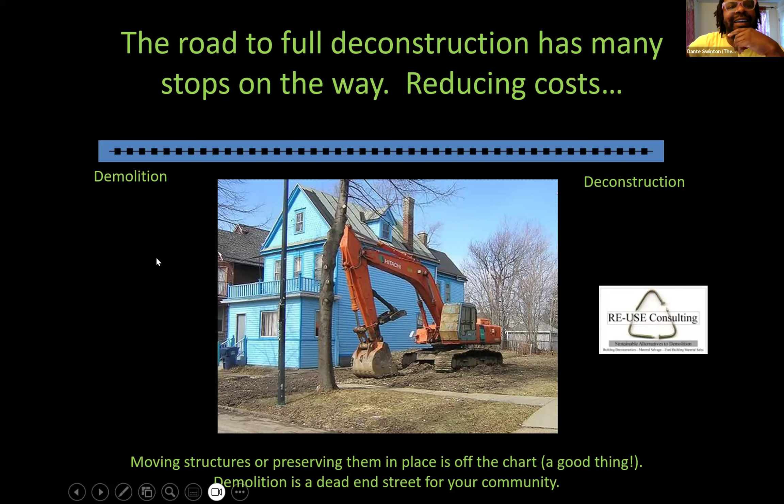But I want to jump in to say that there's been some interesting discussion going on regarding the demand needs in Baltimore when it comes to material. As I mentioned, we have a lot of important information with us today, that Baltimore's policy would be the first in the country to require a minimum usage of reclaimed material. The demand is going to continue to increase because the city's policy, by default, is going to make it increase. That is a key point in driving the demand.

Plus, I know that Stephanie responded to the comments in the chat. When it comes to consistently getting materials that are less expensive, by localizing material you minimize costs. That's the situation when it comes to recycling glass, for example - it's too heavy to transport anywhere, so it ends up downcycled into road construction and landfill cover. By actually maximizing the value of the material used locally, you decrease the cost, which maximizes the value of the recovered material, and then you proceed to reuse it. That's what we're aiming to do here with the ReBUILD Act.